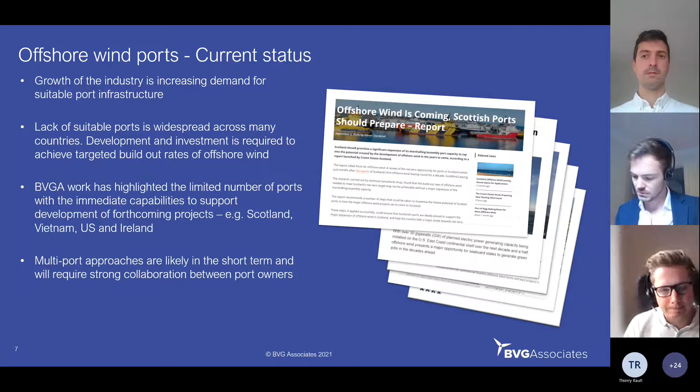So what is driving the demand, and what does the forthcoming demand look like? And I'll keenly focus on Northern Europe here, as is mainly the topic of interest here today. Some of the analysis we've completed of late has highlighted that a further 80 gigawatts is forecast for installation between 2021 and 2030, building on the existing 25 gigawatts, bringing us to a total cumulative of 105 gigawatts by the end of the decade. And that's no mean feat.

This is also driven by the fact that the EU has got a strong push to cut CO2 emissions and increase the uptake of renewable sources. And individual projects and the respective components and the vessels that are used to install those components are growing every day. And this is increasing the sophistication and the demands on ports in order to suit the needs of projects of tomorrow. Therefore, there are requirements to upgrade ports with future requirements in mind, which should be informed by projected and most prominent technology types that we're seeing in given jurisdictions.

In terms of manufacture, which I'll get into a little bit more detail on the next slide, it's important that we understand that for the sheer scale of these components that we're building out now, it's just not feasible to transport these across land areas. Quayside manufacture is the only logical option in terms of large-scale manufacturing activities. And this really does point to the fact that there is a lack of suitable ports to accommodate this, and urgent investment in port infrastructure is required across Europe in order to align with country and continental visions.

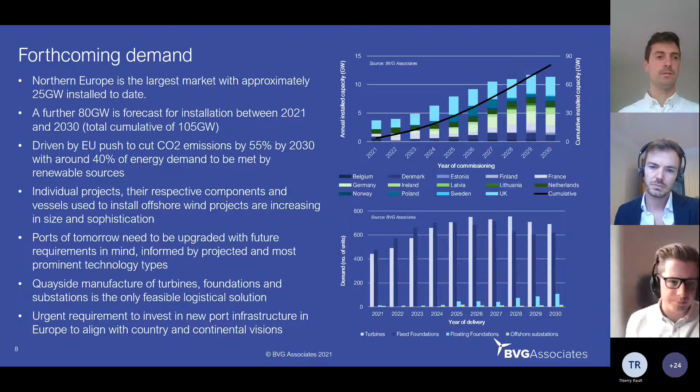So in terms of manufacturing ports, as I've already pointed out, the increasing size of these components means that road transportation is not viable for several components. And portside manufacturing facilities are the preferred option for most large-scale manufacturing operations. In terms of the specifications, by no means am I trying to say that these are the definitive constraints for any port, but it gives you a basis to understand the sheer scale of the facilities that could be required. In terms of quay lengths, we'd probably require of the order of about 320 to 450 meters.

And this is with a view to accommodate vessels that may be bringing in raw materials for a manufacturing facility, whilst also allowing maybe an installation vessel or a transportation vessel to be loading up with a view to move components to a marshalling yard.

Minimum quayside bearing capacities are around about 35 tonnes per metre squared, although I do have the 100 tonnes per metre squared in brackets here. It just goes to show that this is changing all the time. As components are getting bigger, this is increasing the strain on quays, and we're starting to see developments of ports accommodating for future implications.

Storage areas are important as well, so you can lay down your completed parts when they've been manufactured. They often require about 10 tonnes per metre squared. Again, that will likely increase as components get larger in terms of weight and scale. And channel depths, of course, need to be around about 9 to 10 metres below chart datum to accommodate the draft of these large-scale installation vessels.

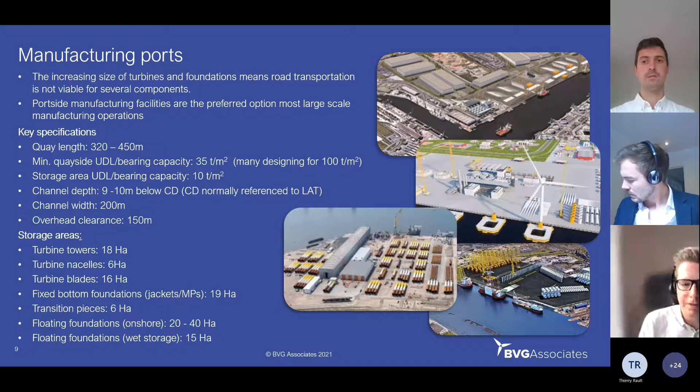In terms of the investment scale and opportunity, I draw some of the perspectives that have been outlined more recently by Wind Europe, and we've been working closely with them over the last 3 to 4 years. They've pointed out that an upgrade or an extension to an existing port facility could be of the order of 20 to 80 million, whilst a new port facility would be probably upwards of 100 million in most cases.

Similarly, for floating, where there may be different constraints, maybe a greater demand on port landside space, or indeed slipways to launch completed foundations, it's anticipated that this could reach around about 200 million per facility. And decommissioning, despite this being quite some way off, and we're still probably at the early stages of considering what this is likely to be, will probably require extensions to existing facilities or new dedicated facilities around 5 to 10 million euros each.

Hydrogen is such a hot topic, and indeed every port facility that knocks on our door at the moment is asking us about the potential for hydrogen, whether that be to store or to transmit hydrogen across energy grids in the longer term. Any sort of facility would probably require of the order of investment of 100 million in order to accommodate for that type of activity.

So in terms of what's required for 2030 in Northern Europe, it's expected that with the existing 30 ports, if they were all to upgrade their facilities, that would require of the order of about 1 billion investment. If there are to be another 15 to 20 new build facilities that are currently projected at the moment, this could also require another €2 billion of investment. Decommissioning facilities, despite being some way off, would require of the order of 50 million. You'd probably start to see those emerging mid to late decade. And of course, dedicated floating ports would also require about 1.5 billion worth of investment.

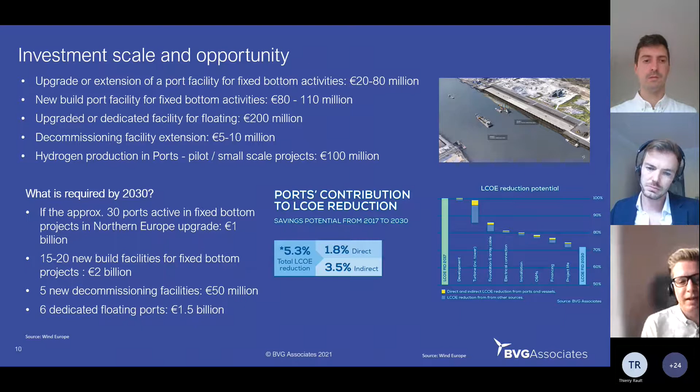So for construction and marshalling ports, what do I mean when I say construction marshalling and assembly ports? Well, they're used as intermediate points in the supply chain for projects, and there might necessarily be 2 assembly facilities. So typically one for turbine marshalling and one for foundation units. They require unrestricted access to the sea and offshore and have large storage areas for the components required to be transported offshore.

They have a number of key drivers, really. Importantly, they allow the expensive installation vessels to keep working efficiently, potentially utilising cheaper transport vessels and barges to shuttle components back and forth offshore. There's also critically, with multiple global supply chains that are increasingly being used on Northern European projects, an opportunity to consolidate for efficient installation offshore. And as Jack alluded to as well, component sizing increasing also limits the production rate potentially at fabrication facilities, and their ability to store these ever increasing size of components.

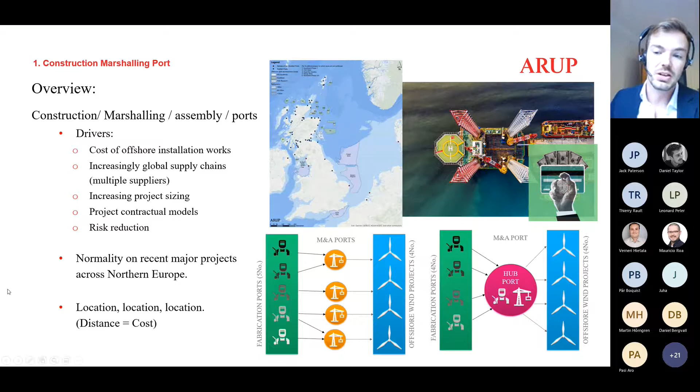So for countries beginning their journey in the offshore wind sector, particularly crucial and relevant in opening up local project development, and critically for construction and marshalling ports, the location really is king, with a direct impact of the location and the distance offshore to the cost.

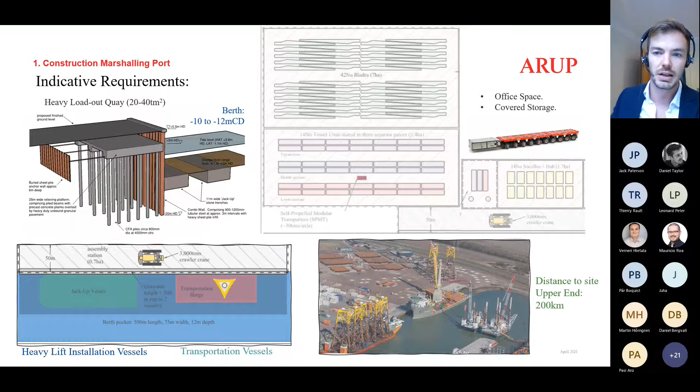So touching on a few real world examples. The photograph I showed on the opening page was the BOW terminal, which was a port in Vlissingen in the Netherlands. This was used for the East Anglia 1 project, which I worked on, and it held the foundation jacket and pin pile components and acted as the point of contractual exchange of the components.

Crucially with this project and many, flexibility of the lease terms for the quay and the storage area was an essential part of the project. There were a few delays in the project due to manufacturing challenges with some of the components, so we had to make use of the contractual terms allowing us to modify the areas leased throughout the project.

The project also saw some organic growth in terms of ancillary activities within the port. This included increased inspections of the structures themselves, as well as some works around fixing some of the defect items, such as some painting works activities.

So again, the presence of the marshalling port helped in de-risking the project, as it provided that final opportunity for any of these activities to take place without delaying any of the more expensive and challenging installation works.

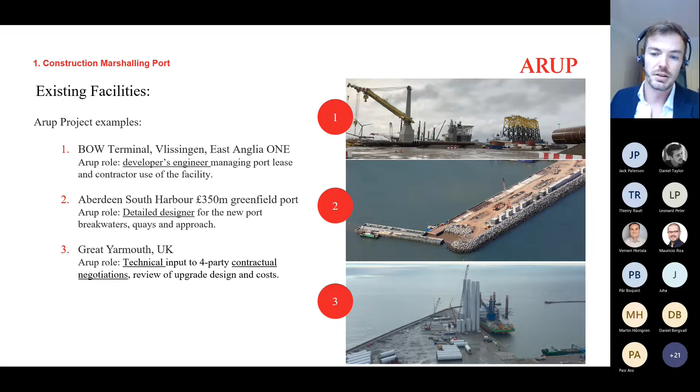The capital costs of the upgrade works were in the order of £5 million, and the works included a piled heavy lift pad, quay wall modifications, as well as development of the storage area with some raft foundations and resurfacing, for a total facility of around 20 hectares. The total project time for this was in the order of 18 months.

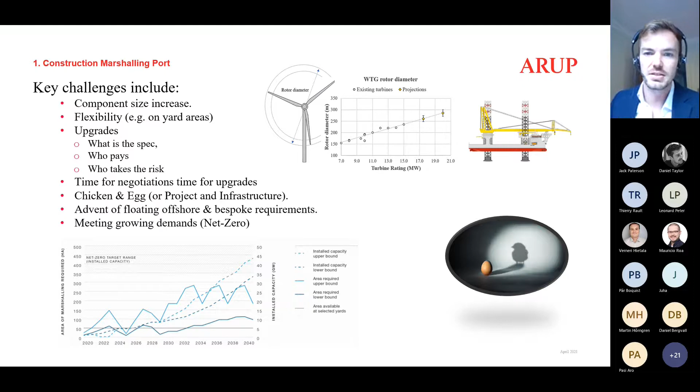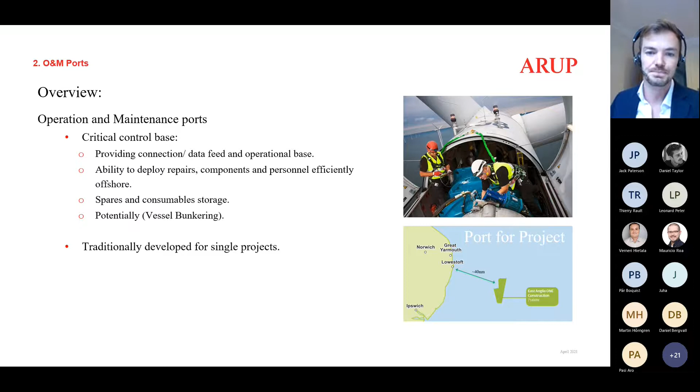In early projects, the facilities have often been developed as a bespoke facility for a single project, specific for a specific location, and a port facility capable of delivering that. So in terms of the requirements, the two key models at the moment on many projects are either crew transfer vessels, referred to as CTVs, or service operational vessels, SOVs.

The key decision-making points around which model is used is often really a mixture of considerations, including the distance from the capable port facility to the offshore wind farm, the potential number of wind farms being operated in and out of the facility, potentially also the payloads and works that are likely to be taken out offshore, and critically the duration and scheduling of these maintenance works. There's also limits on the potential sea state, and depending on the site conditions and required operational windows, this could also influence the decision, along with many other project or potentially developer specific considerations.

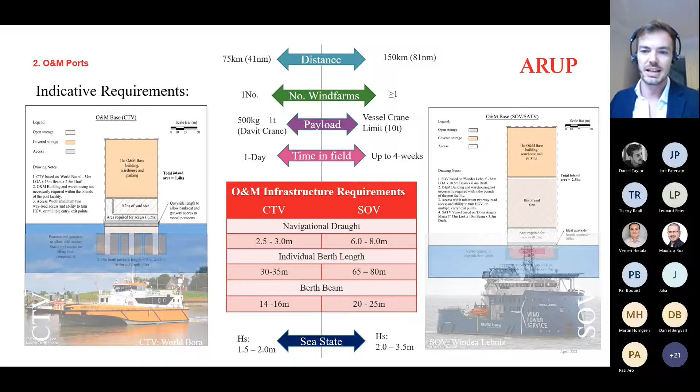The crucial difference with regard to the port infrastructure itself is really around navigational approach and the berth and draft requirements. CTV vessels require lower drafts of around 2.5 to 3 meters, potentially opening up opportunities to many smaller ports, compared to SOVs that will typically require 6 to 8 meters draft, which could potentially limit to a certain number of ports.

So I'll quickly touch on a couple of examples. Firstly, with Lowestoft. This is a CTV-based O&M facility, which is only around 1.5 hectares in total, and contains marine pontoon access for the CTVs, as well as the operations building and warehousing for the East Anglia 1 project.

I worked on this project whilst I was seconded to SPR with the Arup team, and carried out some technical and commercial review that fed into the port identification and selection process. I also assisted in development of the specification of requirements and wider technical input into the master planning and the reference design. The works in total for developing the marine facility, as well as the onshore building works, was in total around 5 million.

Moving on to a slightly different facility, the second example here is Grimsby Royal Docks, which has become a bit of an O&M hub supporting multiple developers and projects. This facility is capable of berthing multiple SOV vessels and also CTVs, with pontoon access available there. The site has offices and warehousing as well for key component storage, and the upgrade here was in the order of around 10 million, and provides a large facility capable of future projects and growth.

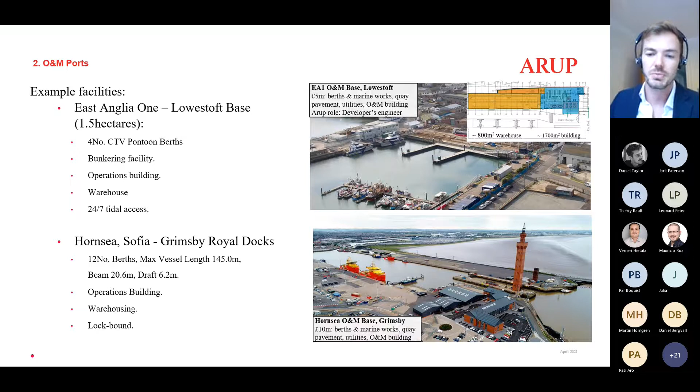So with operation and maintenance ports, there's obviously multiple challenges, but also opportunities for projects. Commercial challenges come in the form of a variety of customers and potential varying needs. There's also potential challenges for developers to justify investment without a potential pipeline of future projects as well. Conversely, there could be opportunities for developers in taking that longer term view to create those hubs and enable and encourage clustering and efficiencies from centralized bases, as with the example at Grimsby, and as well the Port of Tyne, where Equinor are looking to develop their base.

There's also opportunities for embracing future technologies as well, such as drones and remotely operated vessels, to improve safety, enable some cost saving, and have a more efficient maintenance regime, and critically also hopefully reducing the carbon footprint of operations. So finally, on that note, and cognizant that the renewable sector really won't be truly green and sustainable until it addresses the wider life cycle and carbon consumption.

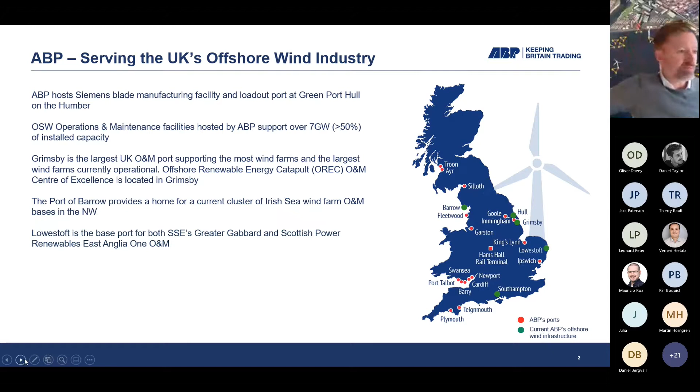The point of my slide deck today is to really give you a bit of an insight into a port operator's perspective on some of the investments we've made in offshore wind, some of the lessons learned, some of the things which have gone well, some of the things which we're going to learn from and use going forward.

As mentioned earlier, we've also seen that the UK government has made an investment in the south bank of the Humber, with our colleagues at Able and the AMEP facility. But in terms of Green Port Hull, it represents around a £310 million investment, of which ABP put in 150 million. It's approximately a 54 hectare site with, what you can see there on the river, 3 heavy lift berths capable of supporting jack-up operations.

The facility exports blades not only to UK projects, but to other pre-assembly ports in the UK and also to other markets. So the Siemens facility has been previously or is about to be used for export into other markets, possibly into the US and back into Europe. The investment in the infrastructure we made included provision of a ro-ro berth. That was to allow the import and export of not only components but raw materials. The benefit of that is it allows you to continue your import and export operations while you've got jack-ups doing the main loadout activity.

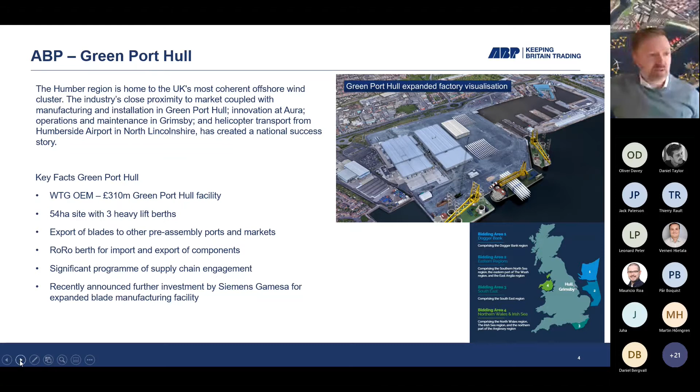The investment itself wasn't just in the physical infrastructure, but also in a program of wider supply chain engagement to try and encourage the supply chain to cluster in and around the Humber to support Siemens, but also the wider offshore wind industry. And that's been hugely successful. There was a recent study which showed the level of engagement, and I think it was over 1,000 SME organizations engaged with the program, and there's been a whole host of success stories related to local companies providing services into Green Port Hull. And as I mentioned earlier on, Siemens have recently announced that they're going to make a further investment in this facility by expanding the blade factory there.

So what are the lessons learned? Well, Green Port Hull came into operation in 2016, but it was actually the 3 years prior to that where the real meat of the investment took place. There were around 3 years of discussions in advance of our final investment decision with our customer and government around how we can create a business model to justify this kind of investment. And that really focused in on 4 key elements.

Firstly, energy policy. So we, ABP, needed to know that Siemens could make a commitment to us, but Siemens needed to understand what their commitment was going to be from the various developers with offshore wind projects in the UK. And then, in turn, those developers needed the government to provide them with confidence that they could bring their projects to the market. And that was a bit of a market breakdown in the UK at that moment in time.

So the government, industry, and the developers came forward with what we called the FIDeR, the FID enabling projects, which was a period in and around 2013, which enabled those projects to secure a route to market, which allowed Siemens to secure some orders on the back of those projects, which then meant they could make a commitment to ourselves. That was very much a moment in time. The market has completely changed now, and in the UK we switched to a CFD model, which I'll come on to later, which is causing some timing issues around these large investments.

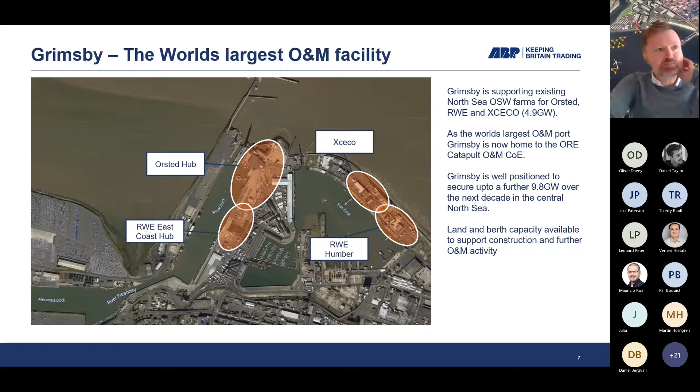So moving down to Lowestoft, and taking learning from the Grimsby operation in the transition from CTV to SOV type O&M operations, we are looking to bring the Lowestoft Eastern Energy Facility project to the market. This is a redevelopment of the outer harbour to allow SOV operations to be undertaken out of Lowestoft.

And the reason we're looking to invest in Lowestoft is there are a huge amount of gigawatts to be installed in the southern North Sea in terms of offshore wind, and we feel there is a real need for an O&M dedicated hub to provide up to 10 gigawatts of offshore wind farm with a location where they can come and bring their SOVs.

In addition to that, we're also looking to use this upgraded port infrastructure for construction support activities. Not necessarily the larger vessels that we've previously spoken about, but some of the kind of support balance of plant type operations during the construction phase. We would certainly be keen to encourage those guys to come to Lowestoft.

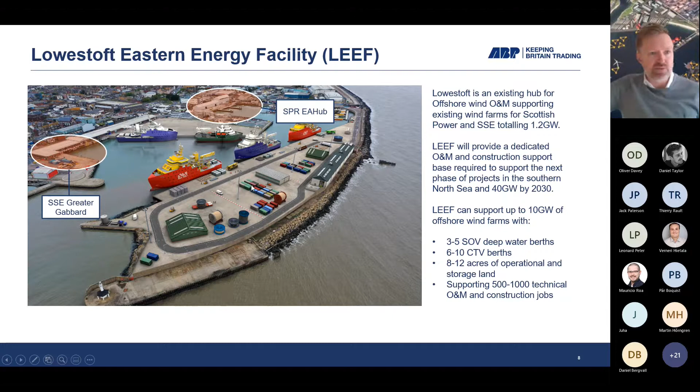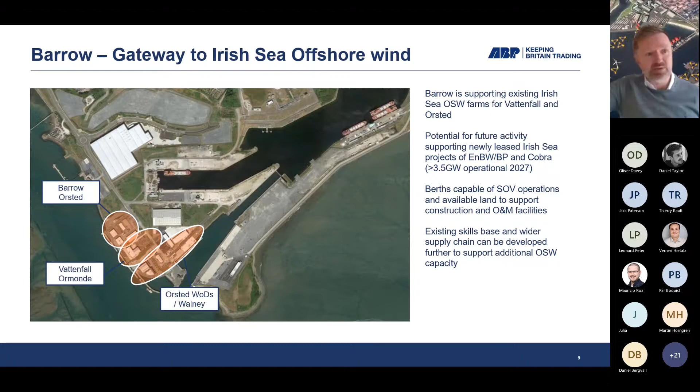And then finally, across in Barrow, we're currently supporting a host of offshore wind farms over there. Again, we do have potential here to switch from CTV type operations to SOVs because we do have the water depth, albeit behind a lock as we have in Grimsby. But there's up to 4 gigawatts being installed in the Irish Sea, and we believe Barrow has the development space and the laydown area to be able to support those projects going forward.

In addition to the physical port infrastructure, we're also being asked a lot of questions at the moment around the future, particularly in terms of operations and maintenance, how the port infrastructure can help make O&M activities more efficient. And that really centers on 2 key elements. The first one here is around decarbonising marine operations.

So I've got a little diagram here which shows you can potentially use green electrons, whether they are created on site or off site in the port environment, to one, provide shore power to the O&M vessels, the CTVs and the SOVs, or if those vessels require, for example, battery hybrid technology, they require recharging services from the port infrastructure. We need to be looking at that now, because that has the potential.

If all of these vessels switch to battery technology, all of a sudden we would need to upgrade the HV supplies into the port environment. We would have to rethink how the local electrical grid is perhaps designed in and around the port in the future. As well as that, we're also in discussions with various organisations around the potential for hydrogen production, either on site or off the port, which can then be brought into the port environment to feed hydrogen-fueled vessels in the future.

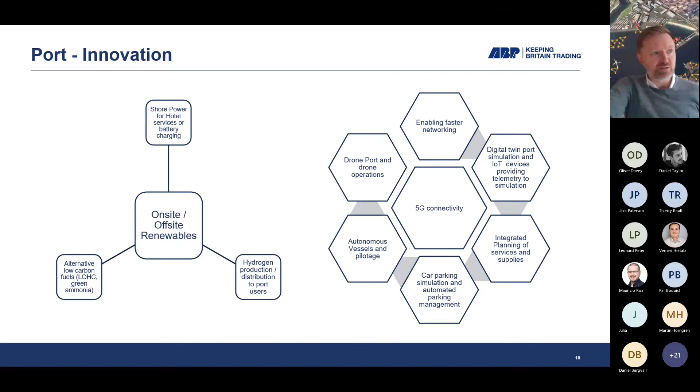And finally, I just wanted to briefly touch on floating offshore wind. The lessons we've learned from Greenport Hull were very specifically around the fixed bottom and the market for offshore wind at that moment in time in the UK.

We do have plans to create a floating offshore wind hub in the south of Wales, in a port called Port Talbot. We believe it has the technical features and the relevant brownfield land to be able to support certainly the Celtic Sea, and beyond that, with the fabrication of foundations and the pre-assembly of turbine components. But we are using the learning from Greenport Hull in terms of the business model to support that.

We've learned that in the current CFD world, the decision timing for commitment from the developers or the supply chain doesn't align with the timescale required to develop a port or a development of this size and nature. So we are currently in discussions with government, both local and national, about how we can pump prime a development like this, so we can take it out of the CFD cycle of having commitment from customers 2 years in advance of requiring the facility.

That's not possible when you look at the hundreds of millions of pounds worth of investment. You can't make those investments on the time horizon of the CFD auctions. It has to be more strategic, and that's why we would like to see more developers coming together who are looking at a particular zone within the UK and collaborating more on their port requirements to help the port operator themselves make the commitment to the investment in advance of the demand as the projects are needed.

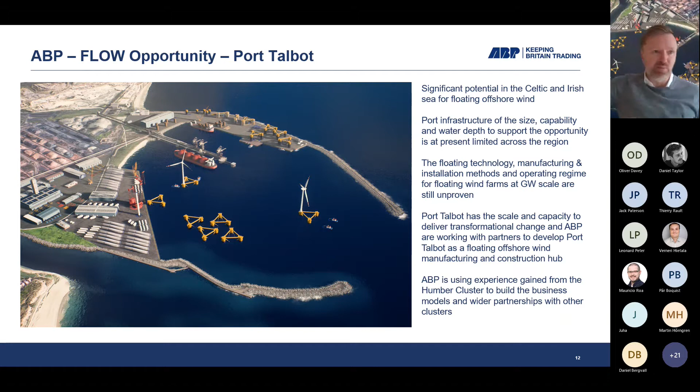So that's all I wanted to say. Very happy to take any questions.

Thank you, Andy, and many thanks to Jack and Oliver as well. This was a great overview of the development in the UK and insight into the cooperation between ports and offshore wind sectors. So now we have some time for questions.